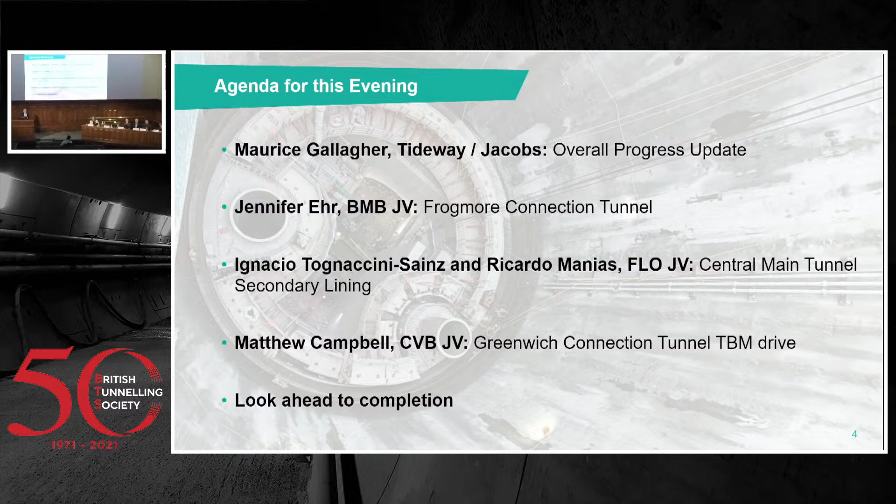Very quickly, and I won't spend much time because I think most people understand why we're doing Tideway. We've got combined sewer systems, so when it rains heavily, stormwater combines with foul water and we get discharges into the River Thames. It happens on average once a week, and annually about 70 million cubic metres of sewage flows into the Thames. That's the problem we're trying to rectify.

The solution is we're intercepting those flows. On this sketch, you can see our Victoria worksite. You can see the Bazalgette sewer just to the left of the tube tunnels, where we effectively break into the side of it and, via interception structures, transfer the flows when they get too high into the shaft, which is constructed down through, in this example, the foreshore of the River Thames, via a vortex down to effectively a stilling pond at the bottom of the shaft before entering the main tunnel, in this example, by a connection tunnel. We do have some shafts that are on line to the main tunnel, eliminating the need for a connection tunnel.

Overall, we've got 24 sites and 25 kilometres of tunnel that goes from Acton in the west out to Abbey Mills in the east, where we connect to the Lee Tunnel. The main drive sites are shown as the orange dotted numbers. Number 7 is the drive site for the Western contract at Carnwath Road. Number 11 in the centre is the Kirtling Street site at Battersea, from which the central contractor has driven both tunnels back to Carnwath Road and east to number 17, Chambers Wharf, which is the drive site ongoing at the moment for the Eastern Main Tunnel and will be the reception shaft for the Greenwich connection tunnel.

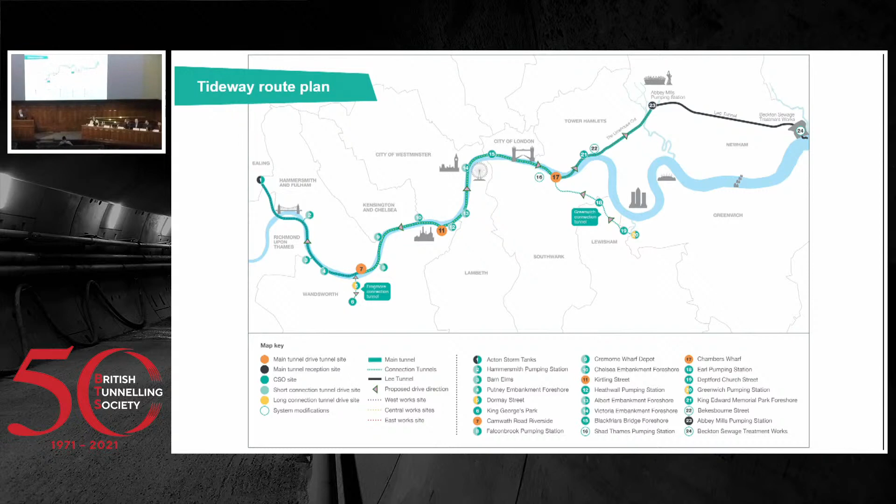I am going to just very quickly do a bit of a safety moment.

We deliver our tunnel segments to site by river. We're currently doing that at Chambers Wharf, and they come by barge to the site and are offloaded effectively by a grab. The grab is remotely operated, so no one needs to go near the segment stack as they're being lifted out of the barge, to eliminate that risk.

Recently, we had an issue with the grab. It got stuck on the segment stack and couldn't become dislodged. Tim, the barge operator, was asked to go in and push a button on the grab to release it. He did so. The load released, but it shifted and trapped Tim's arm. Tim's now off for at least a year, maybe life-altering injuries to his arm.

It just goes to show how easy these things can happen. Someone just trying to do the best they can to get on with the job, doing something that perhaps they're not fully aware of the risks involved with.

On Tideway, we have a process we try to roll out all the time. It's difficult because these sorts of issues happen all the time where people go a bit above and beyond to keep the job going. But on Tideway, we use a process called step back, where if we spot any change, if anything doesn't look right, we encourage everyone to stop, take a couple of minutes, think about the issues, think about whether someone else needs to be consulted, look at what the problem is, and decide if we have to put in a new safe system of work before proceeding.

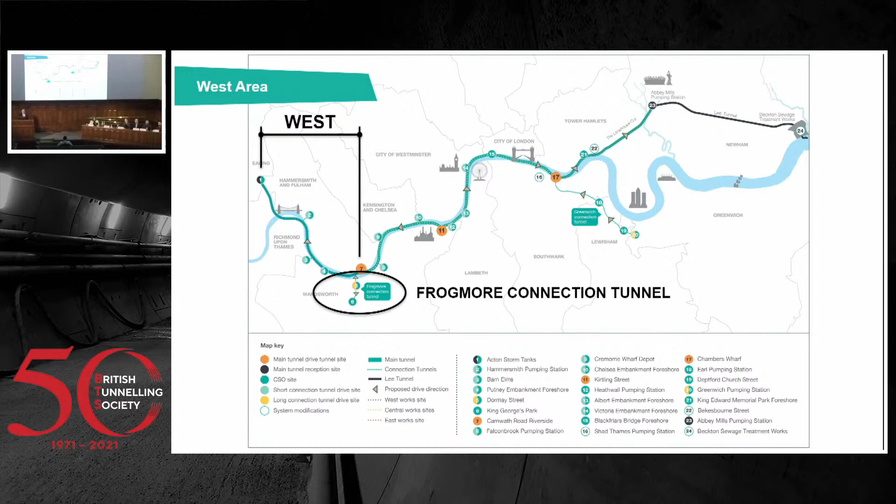You see the Frogmore connection tunnel there is circled. We're going to talk about that later, so I'm not going to deal with that now. But the west main tunnel, this time last year, the TBM had just finished really.

The TBMs were being dismantled. And since then, we've dismantled the TBMs, cleaned out the tunnel, installed secondary lining formwork, and in west now they've concreted over 1 kilometre of the secondary lining in that section of the tunnel.

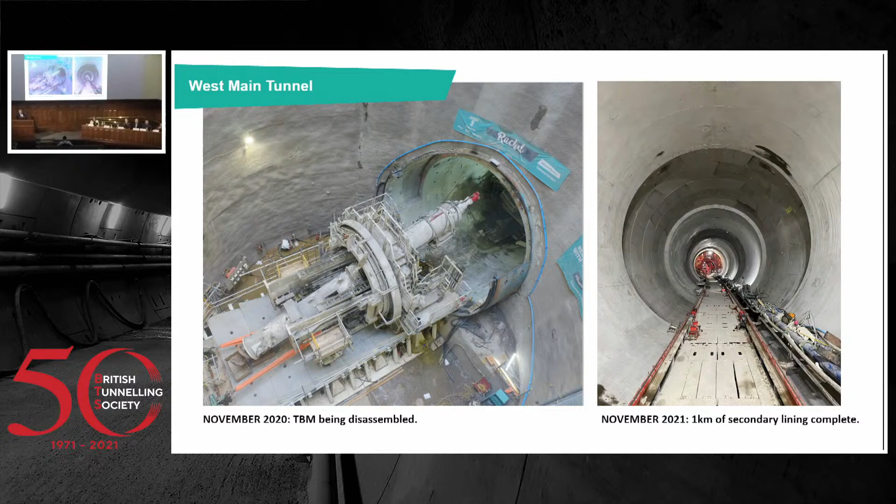Staying in west, there was also an SCL main tunnel element where they had to connect to the central main tunnel. That tunnelling was complete. It's only 140 metres long, but quite onerous works. The SCL works were completed, and now that section of tunnel is being lined, and it's about a quarter of the way through.

In central, 12 kilometres of tunnel, all done. The final tunnel connection happened November last year, with the TBM breakthrough into the CVB shaft at Chambers Wharf. And since that point, up to date, they have got 9 or maybe even 10 kilometres of secondary lining now complete.

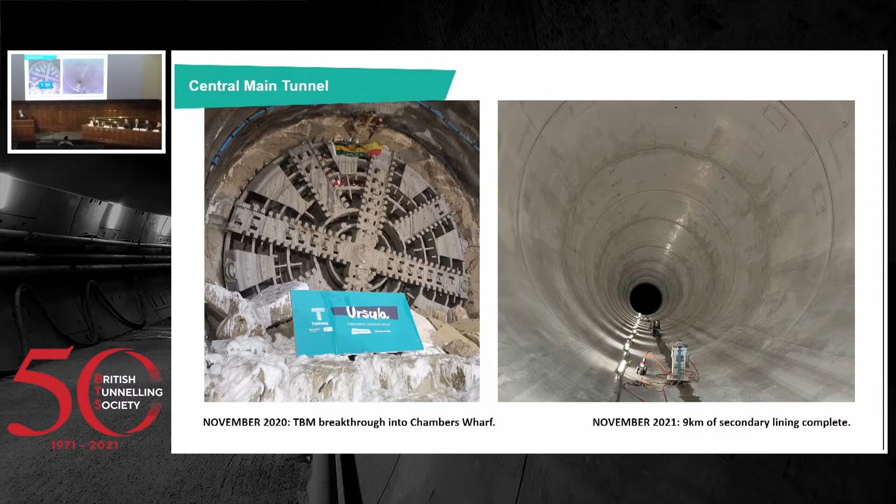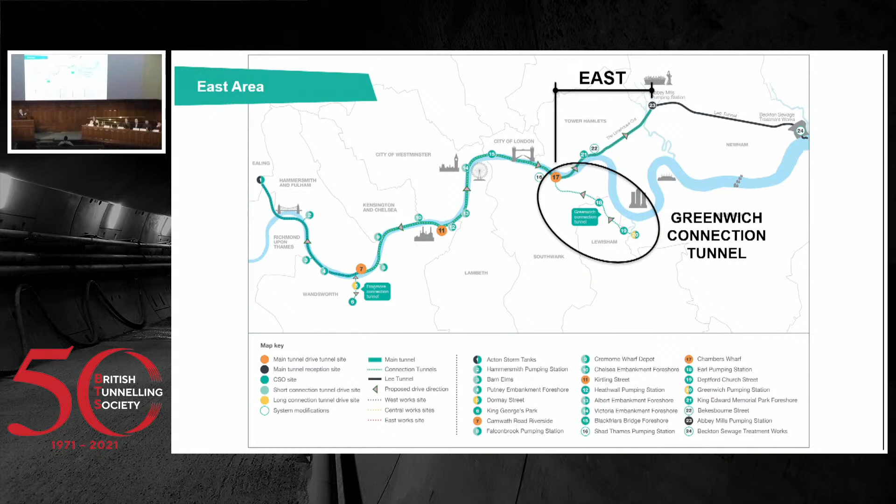And in the east, the only section on Tideway where we are still tunnelling. The Greenwich connection tunnel there circled - we're going to speak about that later, so I'm not going to talk about that now. But the main tunnel is 5.5 kilometres long.

Around this time last year, in November, the TBM was delivered. It came all the way from Herrenknecht's factory in one piece all the way to site. And during November, it was all being assembled in the shaft. This was happening at the same time as the central TBM was breaking into the base of that shaft as well, so there was a lot of works being undertaken through that period.

And to date, now in November '21, 2.8 kilometres of tunnel done. So just over half of that tunnel complete, and work's really progressing well in those tunnels.

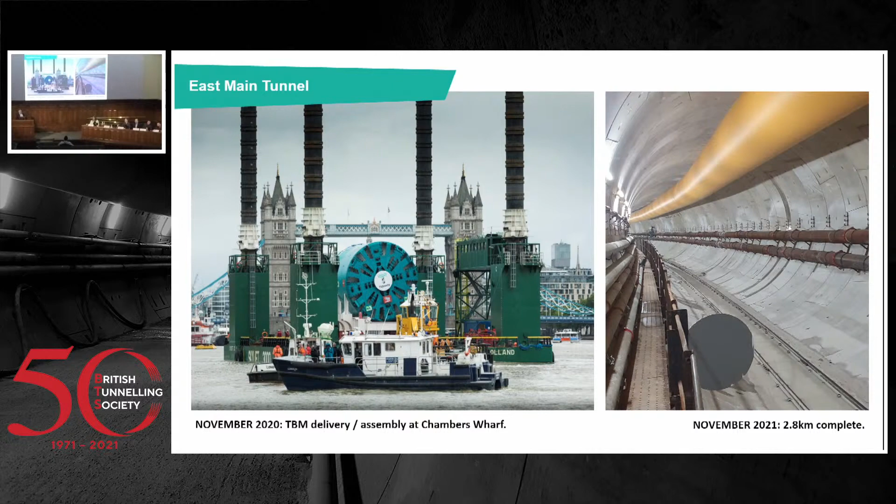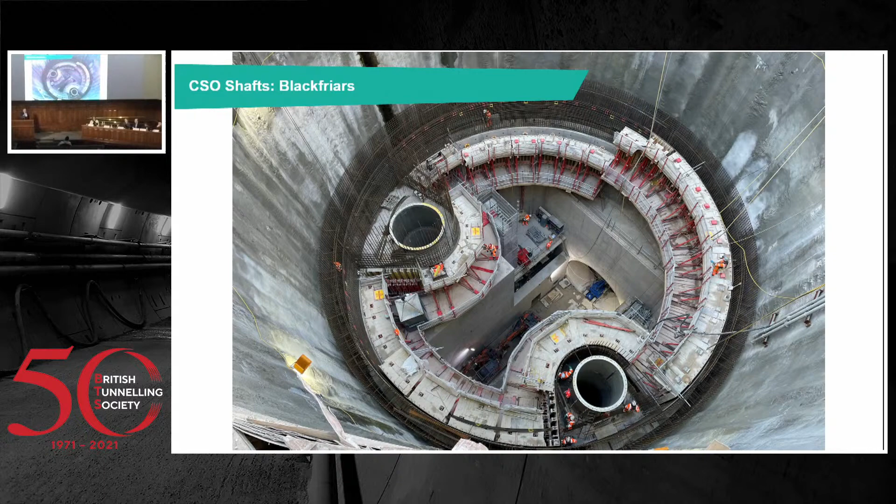Just another shot here - this is one of the smaller sites, at Blackfriars. But just to show the scale of some of the works that we're doing, off to the right of this photograph will be the sewer that we're intercepting, so the flows will be coming in.

Eventually, from left to right, the triangular steel section you can see being assembled is what we call a Vortex Accelerator. The flows will eventually come through from the sewer into that accelerator, which accelerates the flow into the vortex tube, which spins the sewage and takes it the 60 metres down to effectively a stilling pond at the base of the shaft. The scale of it is huge, and that's why I'm showing a few of these photos - it's quite big plumbing, really.

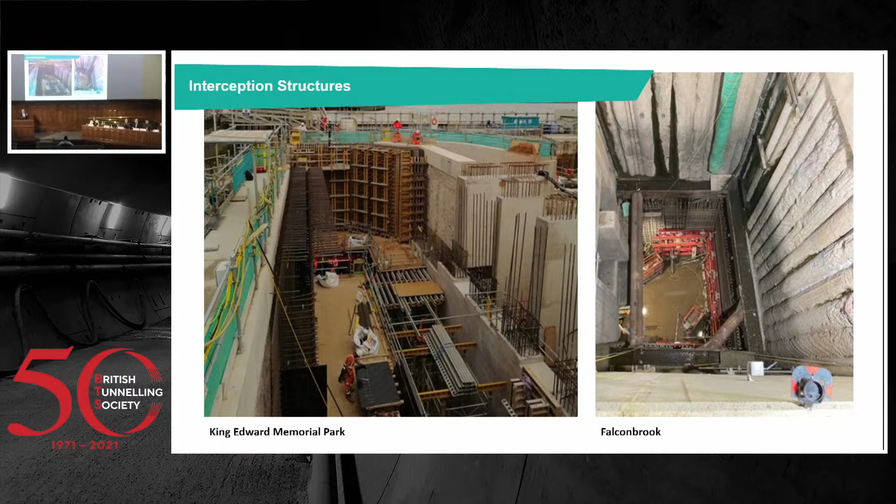I need to hand over for their detailed case studies now. So I'm going to hand it over to Jennifer to give us a talk on the Frogmore.

Good evening, as previously mentioned my name's Jennifer. I'm a site engineer at Dormay Street on the west section of the Tideway Tunnel. This evening I will give an overview of the shaft and preparation works, the primary lining and the secondary lining of the Frogmore connection tunnel.

The Frogmore tunnel was completed in two drives, one from the Dormay Street site to King George's Park and the other from Dormay Street to Carnwath Road. The total length of the tunnel was about 1.1 kilometres with a depth between 16 and 25 metres. Under the river, there was 13 metres of ground above the tunnel, and it was entirely in London clay.

Once commissioned, the Frogmore tunnel will annually divert approximately 18,000 metres cubed of sewage from Dormay Street - that's about 7 Olympic-sized swimming pools - and from King George's Park it'll intercept 86,000 metres cubed, which is about 34 Olympic-sized swimming pools.

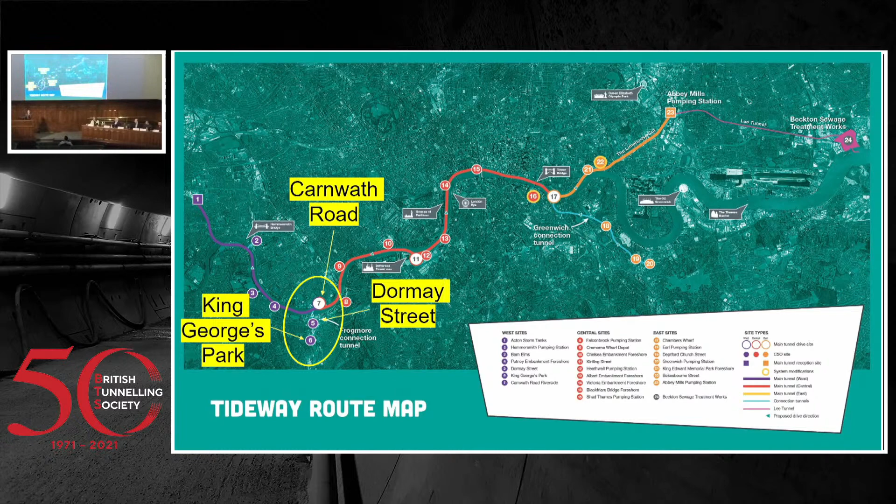One of the main site constraints at Dormay Street has been the strength of the river walls. The river walls 577 and 224 that you can see in the slide had an initial allowable surcharge of 14 and 0 kilopascals, and you can see they're in the zone of influence of the shaft, so construction couldn't begin on the shaft until we'd shored them up.

To do that, we installed 127 piles that would be able to support a slab that would support a 95-ton piling rig until it transported the loads beneath the toe of the river walls. After that, we installed contiguous piles for the river wall strengthening and also were able to install the secant piles to start the shaft excavation.

The river walls had to be able to withstand both loads from the construction of the shaft and also settlement from the shaft itself and the launch chambers that we constructed for the TBM.

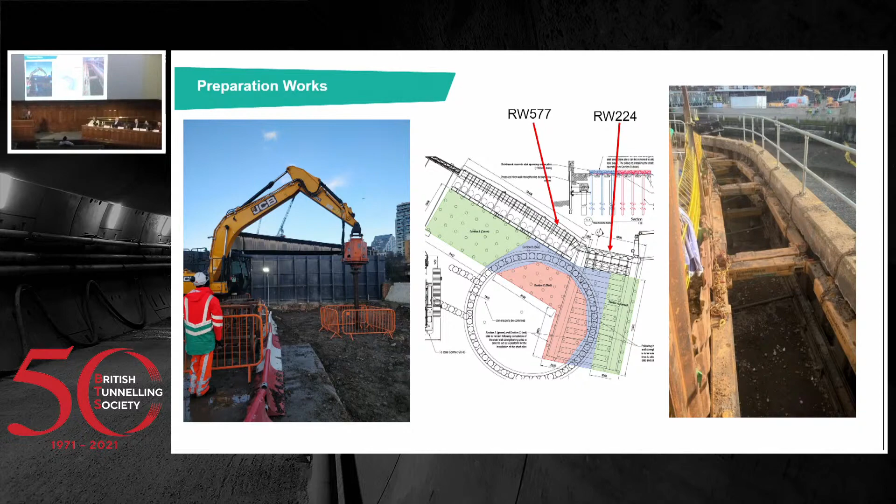The sprayed concrete lining was our primary lining for the shaft, and it was sprayed in 3 passes between a thickness of 375 and 700 mil. As you can see from the slide, we did that in 1.2 metre advances, staggering them with joints at 45 degrees. We made sure to prep them with jet washing and shovel to make sure it exposed fibres so we could get good construction joints.

We used a compound called Xypex in our mix, and that reacts with water to form non-soluble crystalline solutions in the pores and capillary tracts of the concrete. This eliminated our need for a separate waterproof membrane. We used accelerator between about 5.5% and 6.5%, and were fed by the 220-ton silos you can see in the slide.

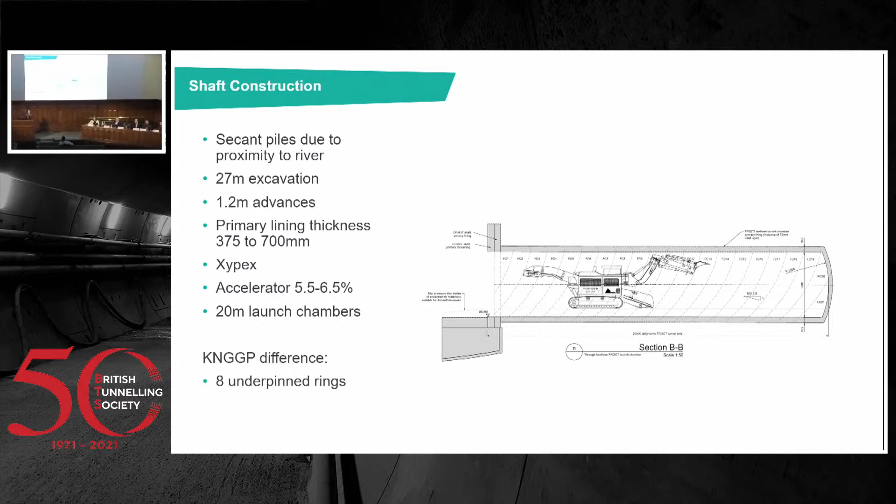Once we had excavated, we made 2 20-metre launch chambers for the TBM. These were of 4-metre diameter - they were actually 3 metres, had a vertical difference of 3 metres in height, the Carnwath drive being lower than the King George's Park.

The King George's Park shaft was done in a pretty similar manner, except there were 9 underpinned rings to start it off. Underpinning was chosen instead of caisson due to the proximity of the adjacent cofferdam.

We overall had about a 27 metre excavation at Dormay Street, and King George's Park, I think, was more like 22.

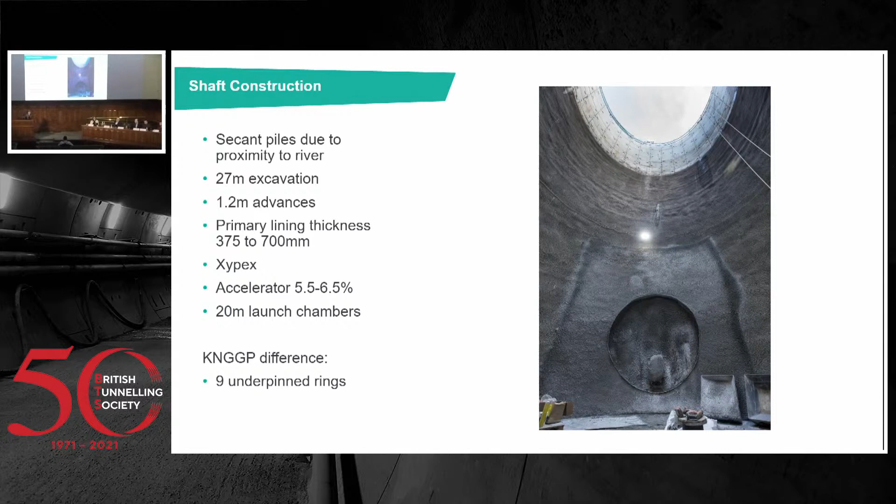Once the shaft had been completed and we'd done the launch chambers, it was time to move to tunnelling. Throughout the shaft, we were working days only on both sites until we went to the launch chambers, at which time we started employing a shift pattern of days and nights, 5 days and 4 nights. Our shifts were 11 hours long, with a break between 5 and 7:30 a.m. in the morning. That was at Dormay Street. King George's Park stayed days only throughout.

The primary lining was excavated, Frogmore was excavated using a Lovat earth pressure balance tunnel boring machine. This TBM was first built in 1994 for the 4.6 kilometre long Fylde Coastal Waters Improvement Scheme. Since then, the TBM had successfully completed 4 further projects, lastly the also 4.6 kilometre long London Water Ring Main Stoke Newington to New Riverhead in 2007, before starting work on Tideway.

However, before being used on the project, it was refurbished and upgraded by Magnor Plant to meet BS 6164 2001 and BS EN 16191 from 2014 as a minimum.

Modifications that had to be made included walkway alteration to enable minimum space requirements to be met. We reduced the manual handling requirements through the introduction of a lifting device to change the ventilation cassette and also drums for the cables. We had new rollers for a davit arm to lift tailskin and TBM grease cans. The PLC units were upgraded, and the screw was also modified with hydraulic rams to extract from the head. As you can see, the nominal cut diameter is about just over 3,300 mil.

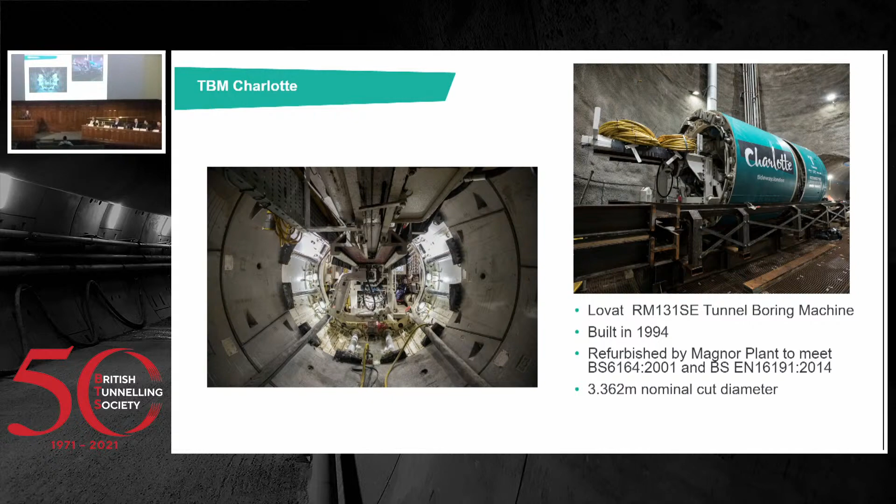For her journey under Wandsworth, the TBM was named Charlotte, after a local suffragist called Charlotte Despard. When fully assembled with 9 gantries, it's approximately 77 metres long.

Charlotte's first drive was from Dormay Street to King George's Park, a journey of approximately 500 metres. With her nominal cut diameter and the external diameter of the rings being about 3.21 metres, there was a 75 mil annulus that was filled with approximately 0.8 metres cubed of grout, each 1 metre advance. Throughout the excavation, the EPB target pressure was 1 bar to obtain a volume loss of less than 1%.

A particular challenge of this drive, as you can probably see from the drawing, was the alignment. This was chosen to avoid sensitive assets in the area and, as much as possible, to stay under the roads. You may have been wondering why I mentioned that the 2 drives are about 3 metres apart in depth, and that's because 3.2 metres below the King George's Park drive, we had a National Grid cable tunnel that we had to avoid. And then for the Carnwath drive, we needed to be far enough below the river bed.

The resulting tunnel contained 145 metre radius curves with approximately 15 rings of straight transition between each curve, and the TBM itself was launched immediately into such a curve. The rings were designed to have 12 different possible arrangements, and they are made of 6 trapezoidal segments. Each ring contained 3 different types of segments, and the maximum lead that could be achieved was just under 33 mil, and that was more than enough to ensure the 145 metre radius curves were possible. They required a 22.5 mil lead.

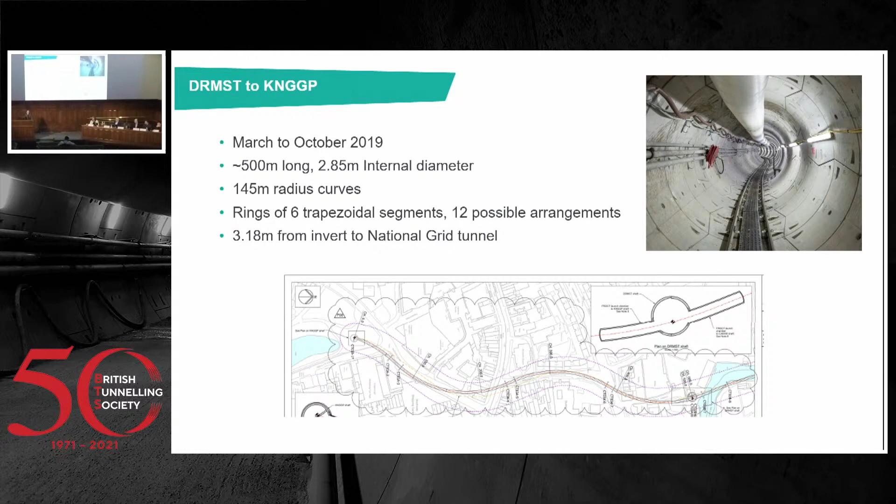The King George's Park drive was entirely through London Clay B formation, and apart from encountering some bands of claystones, the excavation was fairly straightforward. The ground conditions contained anti-clay polymers, and that helped the workability to allow for extraction through the screw.

After successfully completing her journey to King George's Park, TBM Charlotte was brought back to Dormay Street to begin her drive towards Carnwath Road. This tunnel was much straighter and mostly underwater.

However, as we had begun, COVID-19 hit and the country was plunged into lockdown right as we were under some very sensitive river walls. As Boris was announcing that we had to stay at home, we actually continued tunnelling for a week to do a safe stop for the TBM far enough away from the river walls. After that, we spent about 2.5 weeks at home reviewing our work practices and updating our risk assessments, before gaining approval from our client to come back to site.

However, when we did return, we stuck to days only and moderated the number of rings we did a day, conscious that the supply chain was quite affected by what was happening around the world.

Perhaps one of the more interesting parts of the drive was around ring 370, when we were transitioning to fully tunnelling in the A3II formation. We expected that, if anything, the pressure in the head would slightly increase, but we saw that the thrust was dropping a bit, and the driver commented that he'd noticed a change in the ground.

We had been warned of a potential pingo located approximately 50 metres south of the planned alignment at about ring 400, and so we suspect we may have caught the edge of such a drift-filled hollow.

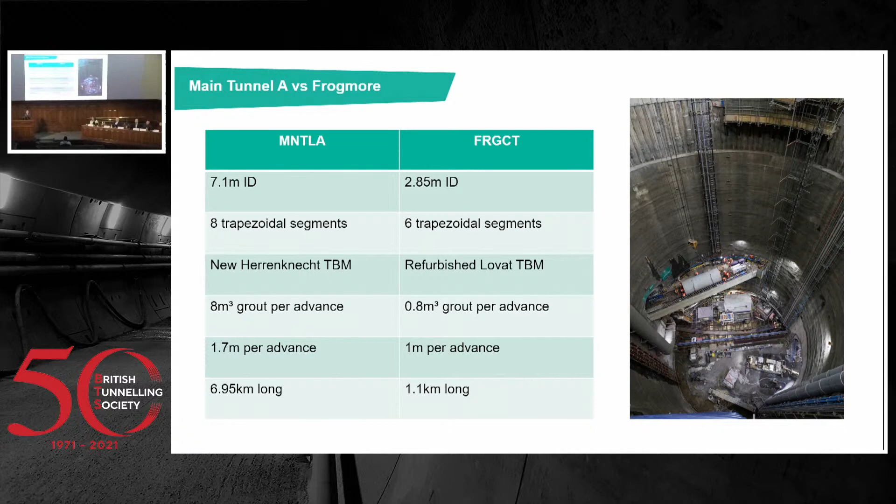The secondary lining of the tunnel was undertaken using shutters developed by specialist tunnel shutter supplier Kern Tunnel Technic. They developed 4 shutters that cast in a hit and miss sequence, allowing for faster production.

The required nominal thickness for our secondary lining was 150 mil to leave a final diameter of 2.55 metres, and the minimum allowable was 100 mil.

The 4 shutters varied in length, so for the King George's Park drive with the tighter curves, we had them be 4 metres long, and extended that to 6 metres for the Carnwath drive.

The King George's Park drive took a lot longer to complete than Carnwath because of COVID, and in total we had 1,420 metres cubed of concrete cast, which, as you'll hear in the next presentation on the main tunnel secondary lining, doesn't seem that much at all.

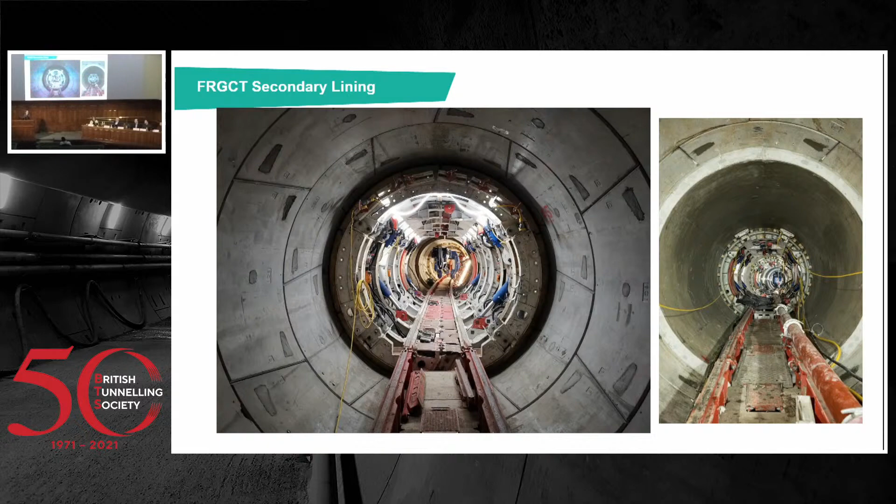The secondary lining of both the Dormay Street and King George's Park shafts was conducted using a slip form technique for the majority of the height, followed by several jump form advances. This was due to the changing geometry of the shaft lining around the Vortex drop tube and generator.

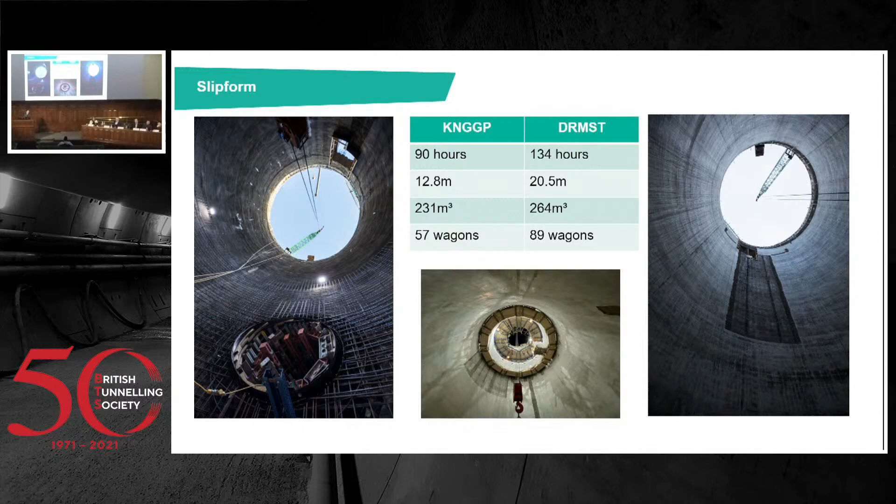The hydraulic structures in both shafts have since been completed. Both contain stainless steel vortex generators and drop tubes, designed to cause the sewage to helically flow down into the bottom of the shaft. There's hydraulic benching at pit bottom that guides the sewage through a weir wall and into the tunnels.

Across most Tideway sites, including King George's Park, both the vortex generator and drop tube are set in the middle of the shaft. However, you can see at Dormay Street that it sits to the side.

This is because the original proposed tunnel alignment had tighter curves, and so this was changed to a 145 metre radius, which meant that the tunnel had to be moved off centre of the shaft. The shaft itself couldn't be moved because of the tight constraints surrounding its location.

Fittingly, both Dormay Street and King George's Park finished pouring their cover slab upstands on the same day.

Working on the Frogmore connection tunnel has enabled me to learn about different tunnelling techniques and work with a range of people with vast tunnelling experience. I'm very grateful to all those who have taken the time to answer any questions I've had as a very green graduate. Thank you for listening.

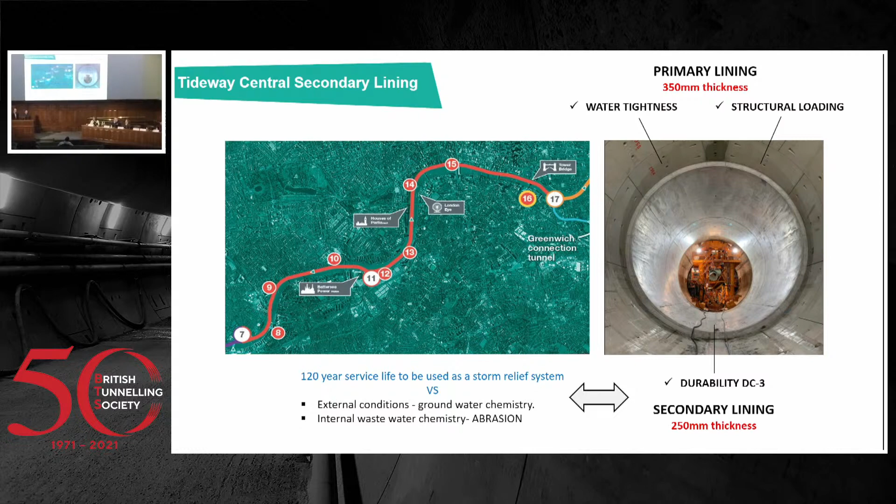Secondary lining has been pretty much an innovative operation for us. We had many lessons learned from past projects like the Lee Tunnel, so we decided as a team to think out of the box and come up with new ideas and solutions to overcome past difficulties. One key solution was the cast-in-situ option with the secondary lining shutters that you can see in the picture on screen.

These shutters were built by Tecosam, a Spanish manufacturer, and we had the opportunity to collaborate with them and co-design what you see here: a prototype that had never been tried in the industry, which has given us fantastic achievements in both production and quality throughout the operation at the tunnel.

The shutters are quite long, much longer than normal in the industry, almost 40 meters long, although the skin part, the gray part you can see in the picture, is only 12.6 meters, equivalent to 7 rings.

The shutters do 75 cubic meter pours, and we have 2 shutters, one on each tunnel, in full production, meaning 2 pours a day on each shutter and 4 pours a day in total.

These shutters are able to properly negotiate the curves of the tunnel, and a key feature is the bogies, the wheels you can see underneath the shutters. These bogies have given us a lot of flexibility when moving and setting out the shutters in the tunnel, which has been key to speeding up and achieving the production records we wanted.

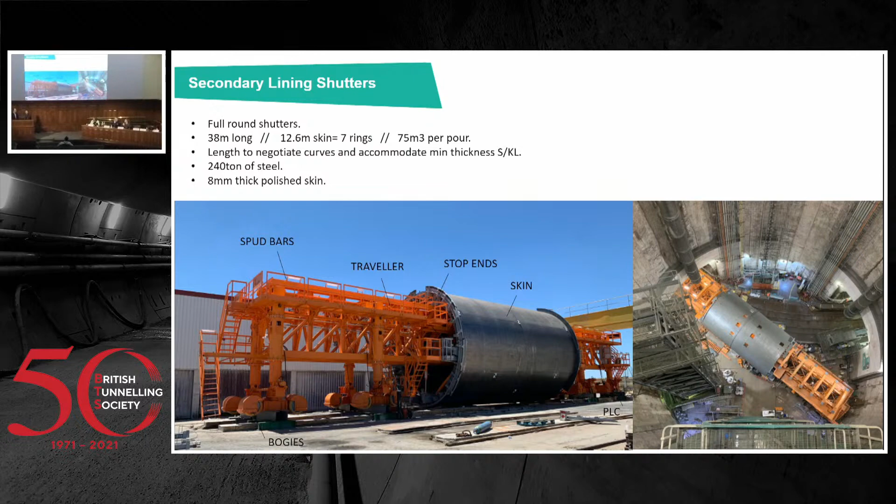We were not able to overload any single segment in the tunnel with more than 40 tons. This was prescribed by our engineer at AECOM, so we had to stick to this condition to make sure we wouldn't move any segments in the tunnel, which would cause leaks and repairs we'd need to sort out in the future.

Here you can see a few pictures of how we built the shutters. This happened during the worst time of COVID in 2020. Despite the difficulties, we brought them on site, built them as a team, put them on SPMTs, and finally put them underground, commissioned them, and at some point they were ready to work.

As I said, the main challenge with these shutters, also a main challenge in the Main Tunnel, was that overloading a segment could lead to a disaster. We reinforced against that by having a powerful PLC control system developed with TecoSam. With this PLC, we made sure the loads were always stable and spread across the primary lining, so we would not overload a single segment.

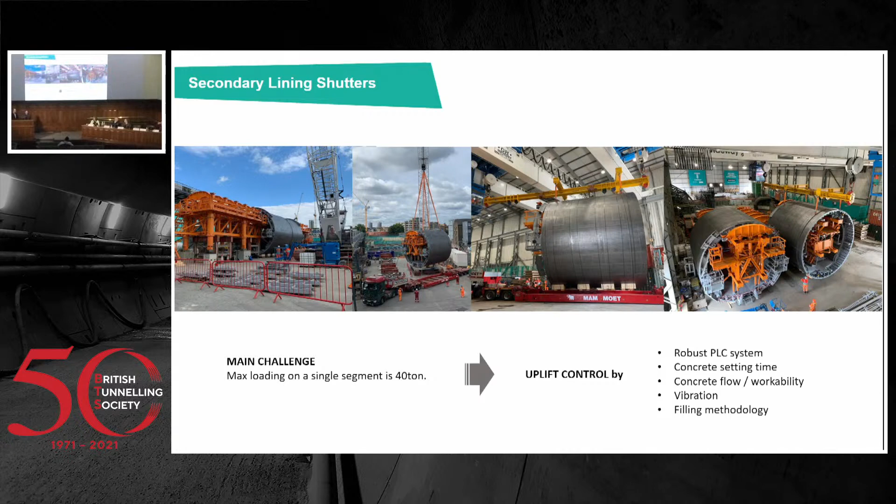Obviously, as well, the expertise of our team members by pouring the shutters in a certain way, vibrating, and many other things have made it possible not to create any mistakes. But the PLC was one of the main things that has made this prototype a great innovation.

On this slide, you can see how we normally pour the shutters and how the PLC interacts. Basically, the spud bars located next to the skin are the ones that actuate at the beginning, in conjunction with the bogies located on the sides. As you start filling, the shutter tries to float, so the load starts to become higher, and the deformation of the curve of the traveler starts to become more and more aggressive.

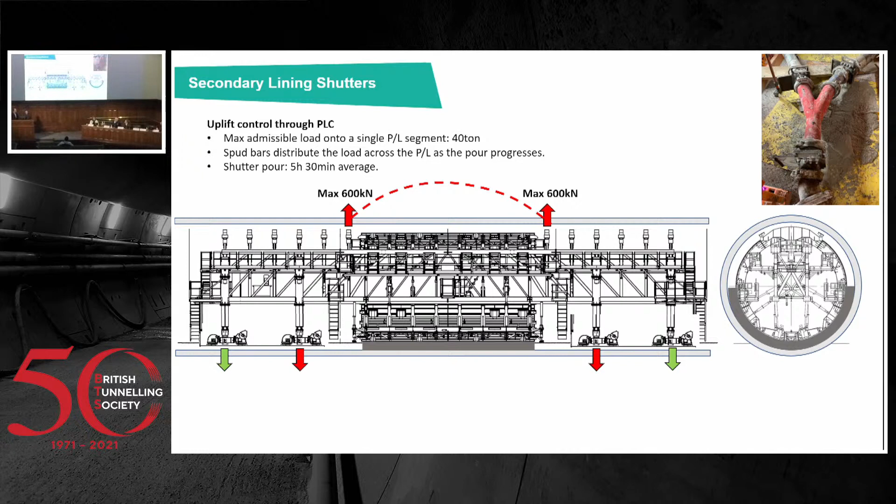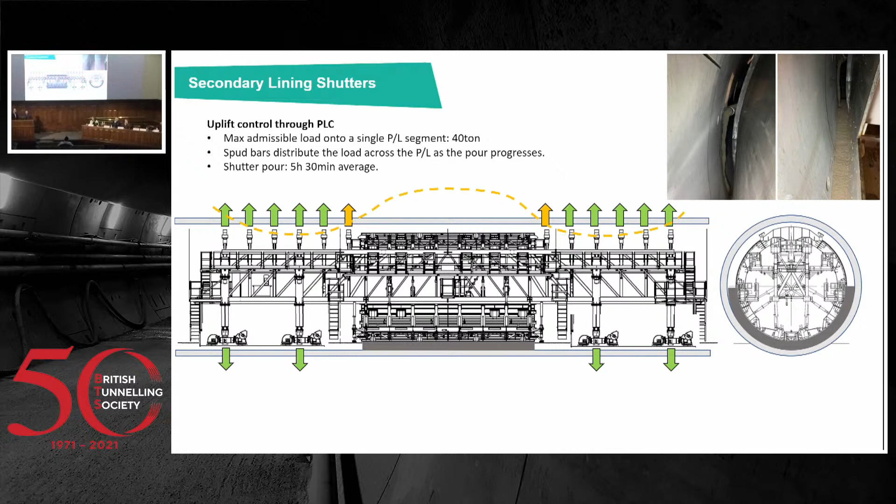In the worst scenario, we have a maximum of 600 kilonewtons that we can use on the spud bars, and this is the limit at which the shutter is trying to float, with risk of overloading the primary lining. In that situation, the PLC acts again and interacts with the spud bars on both sides, so all of them actuate and drop down the curve, as you can see.

Also, the weight of the concrete helps the shutter come down, so in the end the shutter is completely filled, and the last strokes of the pump are done through a port on the crown. With that, we make sure it's completely filled, but at the same time as stable as possible. Normally it takes us 5 hours and 30 minutes to pour.

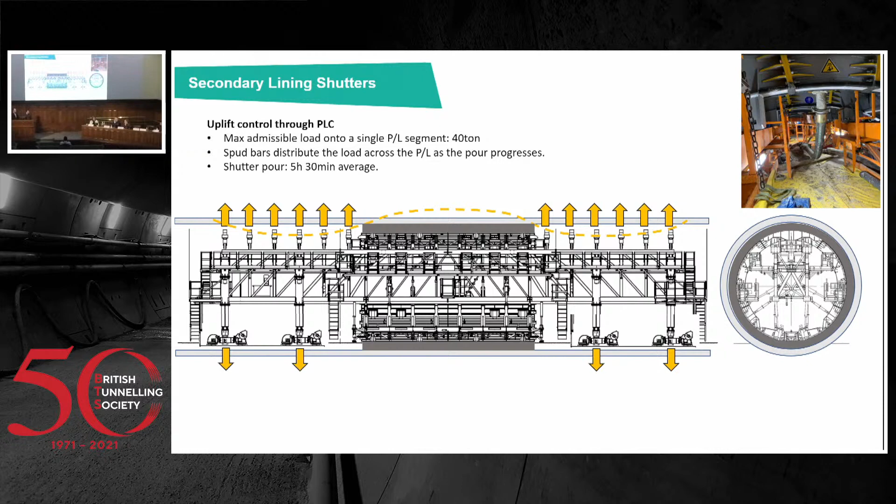Sometimes we've been able to pour in 5 hours, sometimes 6, and when both tunnels were running, the pouring time was penalized, but at the same time we were able to pour both tunnels concurrently, so it was a benefit in the end. As you can see, this is the result of it.

The result has given us very good quality. I dare say Tideway for now are quite happy with what they see. The expectations are so far fulfilled. We don't see many blowholes, we don't see many things to worry about so far. The quality is exceptional, I have to say, and the production has been very good as well.

But of course, while the shutters are important, the concrete is as well. Here Hanson played also an important role, and we worked with Hanson closely for many months with trials on site in order to make sure we would get the mix right.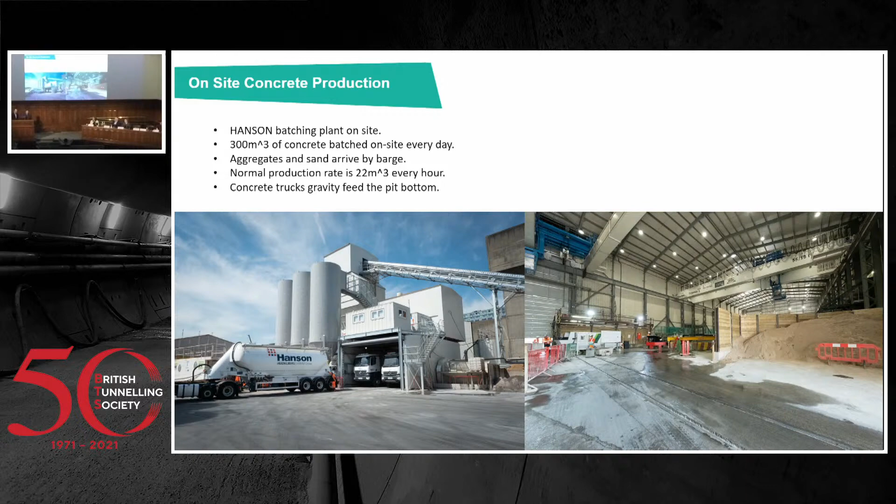The mix, as I say, was quite crucial. It's a steel fiber concrete, which makes it more difficult as well on the transport. And the key thing here was the sand.

We started with a marine dredge sand that turned out to be a bit dusty, and it would not suit our logistics. So we had to come back with Hanson and try to find another solution, and the solution was the Aabenraa sand, which is a land-based quarry sand.

With this sand, we were able to keep the consistency of the concrete that we wanted, so we would have slump flows of almost 700 on top.

And because of the logistics, in the longest distance of the tunnel of 5 kilometers, it would take us 2 hours and a half to take the concrete to the face. In the end, the consistency gets reduced, and at some point we were getting 600, but that's exactly what we were requiring. So in the end, the concrete mix was also an important key player to get this done properly.

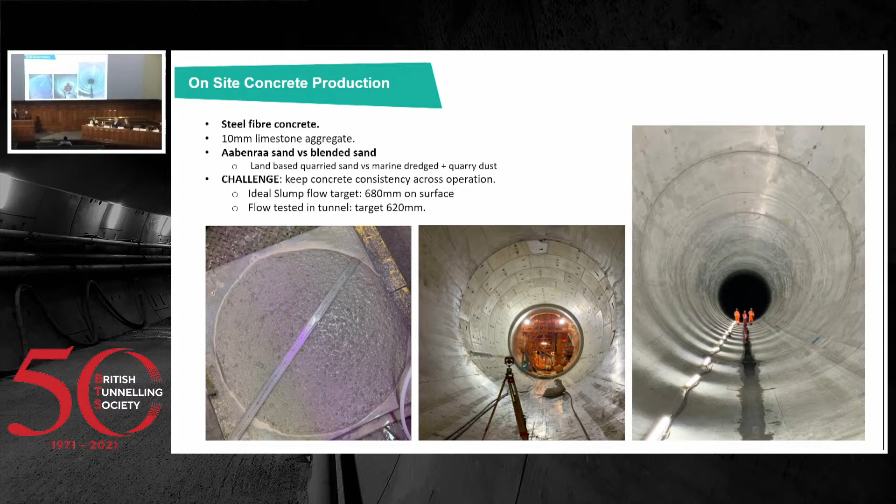I'm going to pass on to Ricardo.

Good evening, everybody. I'm going to talk a little about the rest of the plant and equipment we've been using within the tunnel in order to help deliver the concrete to the shutters.

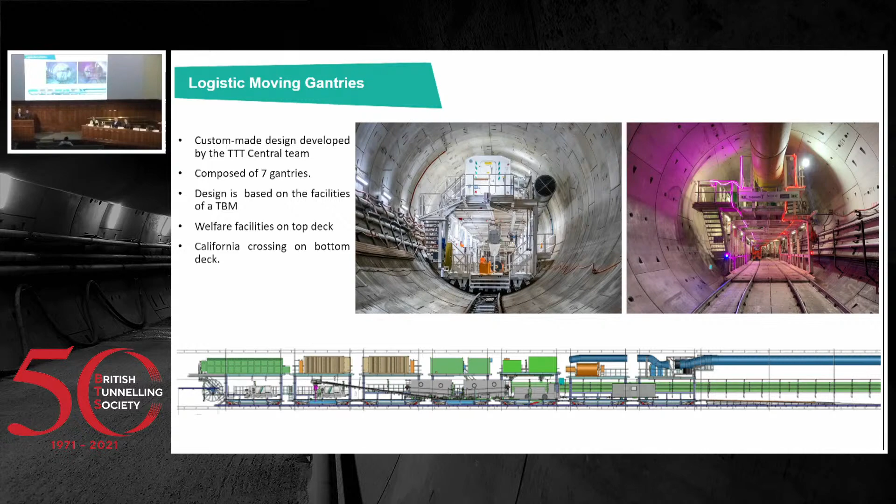As well, I'll talk about the special pours we managed to complete. This is the moving gantry, a machine based on the traditional TBM gantries, used as an auxiliary backup to support the shutters and the concrete operations. It is composed of 7 gantries and a switch at the back to allow the train to travel in and out. On the top level, you can find the auxiliary equipment necessary to comply with work within the tunnel, such as the rescue chamber, welfare facilities, the hydraulic power pack, and the HV rail that powers up the whole convoy.

One of the intentions of the moving gantry is the removal of the services and equipment installed within the tunnel as it comes backwards. This creates a clear section of tunnel between the front of the moving gantry and the shutters for them to be set up and ready for the following base pour.

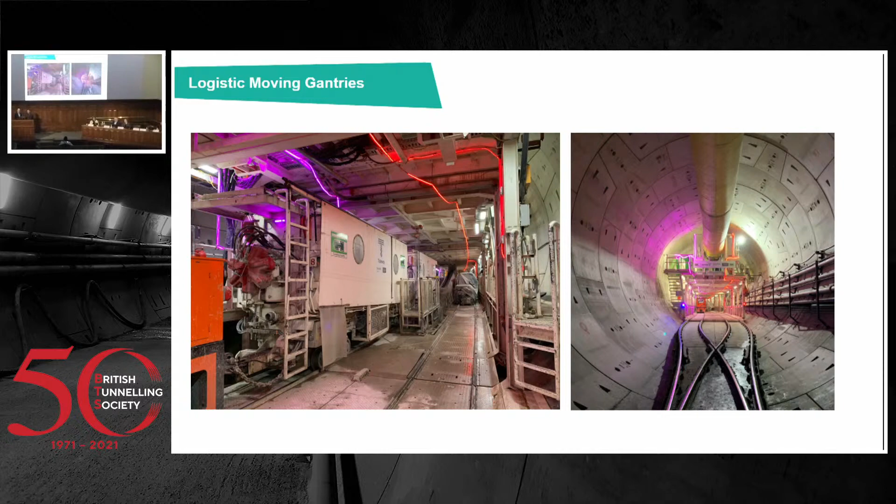The moving gantry has been an essential part of the supply and logistics for the production of the secondary lining. As the train comes in with the concrete wagons, those get parked at the discharge location, then plugged in not only for power reasons to keep the concrete moving inside the wagon, but to communicate with the rest of the elements such as the conveyor belt and the concrete pump. At this point, the final chain, the supply chain, is closed.

We've made a few more modifications to the convoy, like a traffic light system to manage the movement of the locomotives, and a clearer communication system for the operatives working in the shutters and the moving gantry. Also, all the information collected from the temperature and pressure sensors installed on the shutters was transferred to a PLC, to software designed by the PLC department, and displayed in graphs and curves for the engineers to better understand and monitor the process.

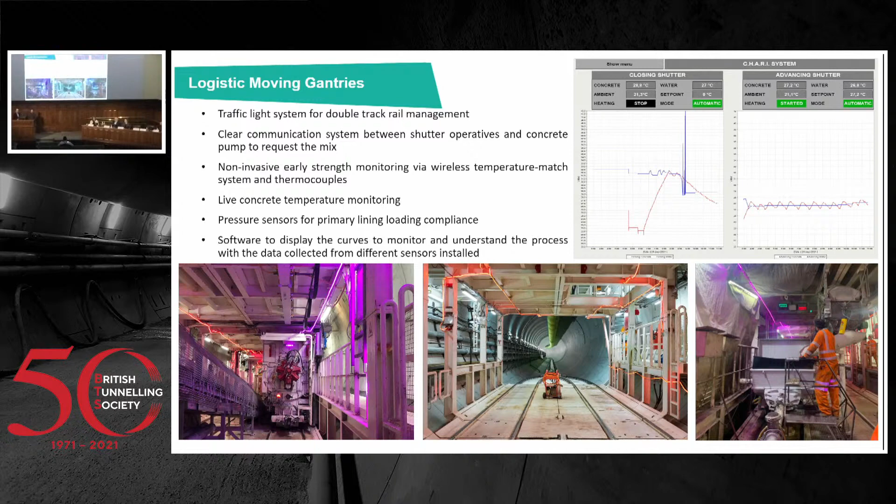Regarding the remixers, Tideway Central proposed a redesign based on the typical grout cars, with the aim of achieving better access for cleaning and maintenance purposes. This machine had to be more robust and powerful to move the concrete inside the wagon. At the bottom of the picture, you can see a typical section of the pit bottom of the shaft at Kirtling Street, when we were secondary lining both tunnels.

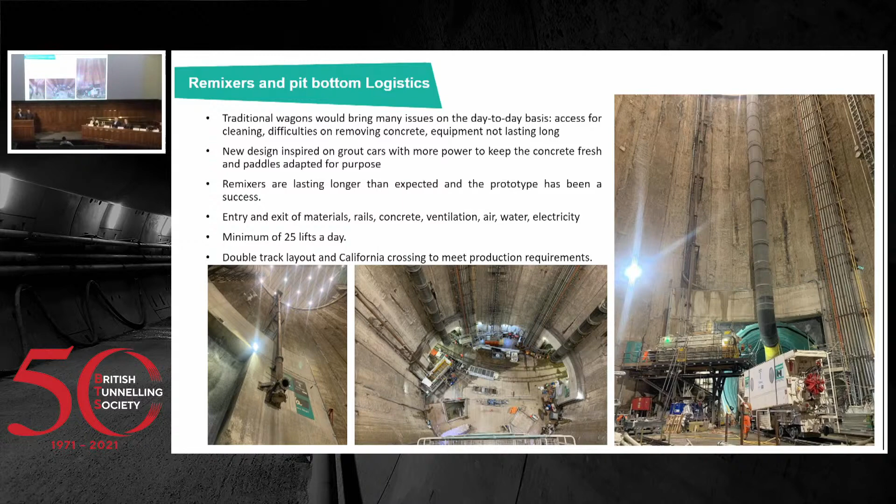As I mentioned at the beginning, we completed 6 particular pours where the connection tunnel meets the main one. In this part of the tunnel, the geometry had to change slightly to get a thicker section and allow the installation of reinforcement. To achieve this new shape, we had to swap and change some of the panels of the shutter skin. All this work happened and was planned to take place in situ next to where the pours were going to occur.

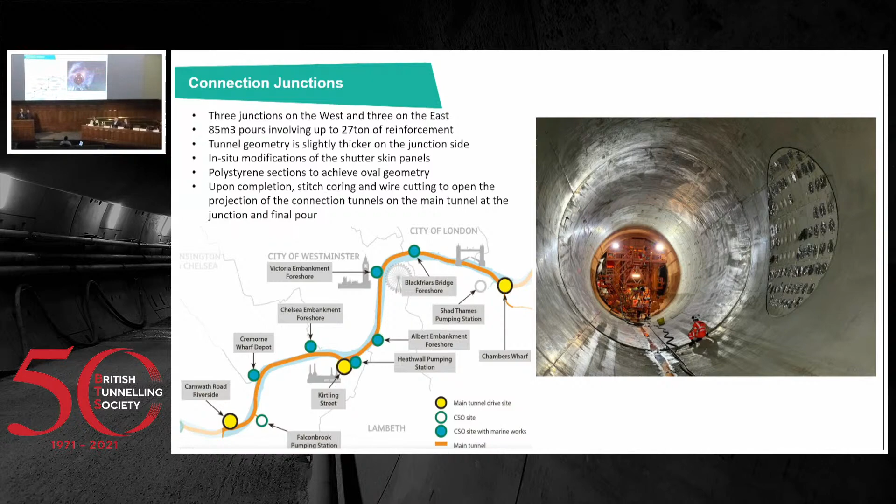You can see here how the works were happening when we were constructing those junction pours. The polystyrene piece shown in the figure was installed to achieve the oval section of the connection tunnel and leave the void for future works. To give you some numbers, this process involved around 85 cubic meters of concrete and up to 27 tons of reinforcement.

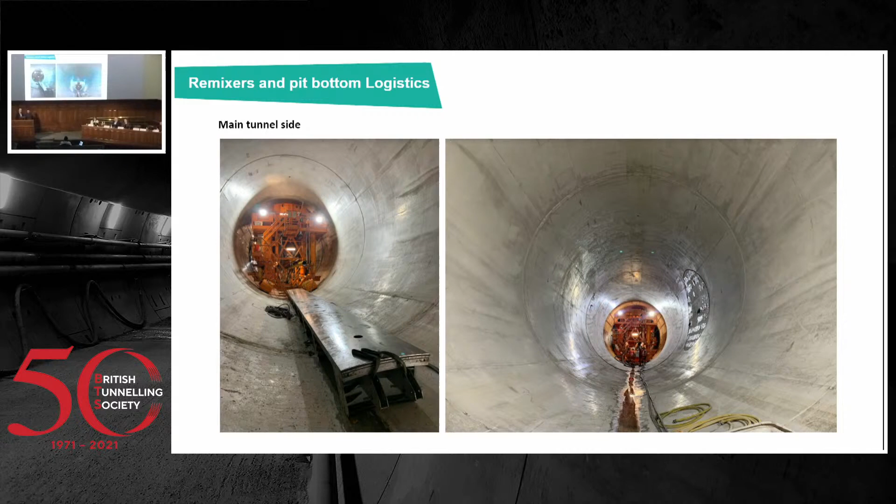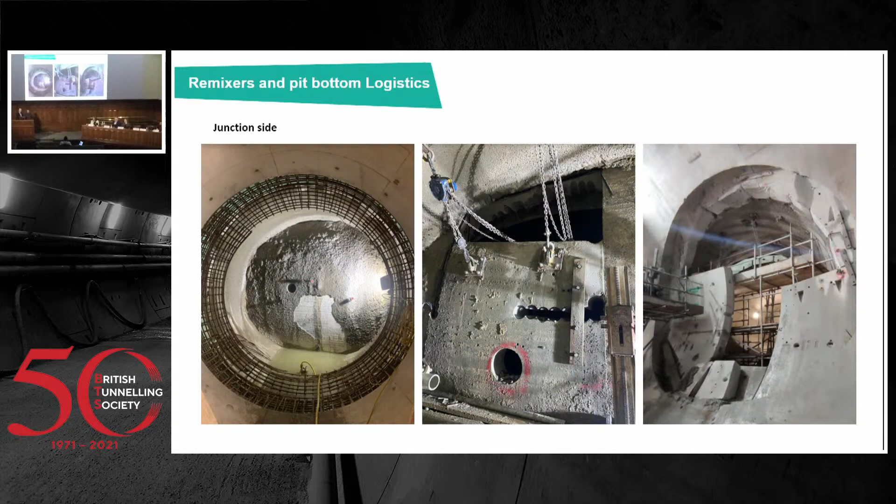Some more figures for the operation: upon completion of the junction pours, the projections of those connection tunnels onto the main one were opened by saw cutting and eventually some stitch drilling. Then waterproofing membrane and more reinforcement had to be installed, obviously, before the work happened, in order to tie back the connection tunnel to the main one. So far, 2 out of 6 connection tunnels have been accomplished by the Falconbrook and Cremorne remote site teams.

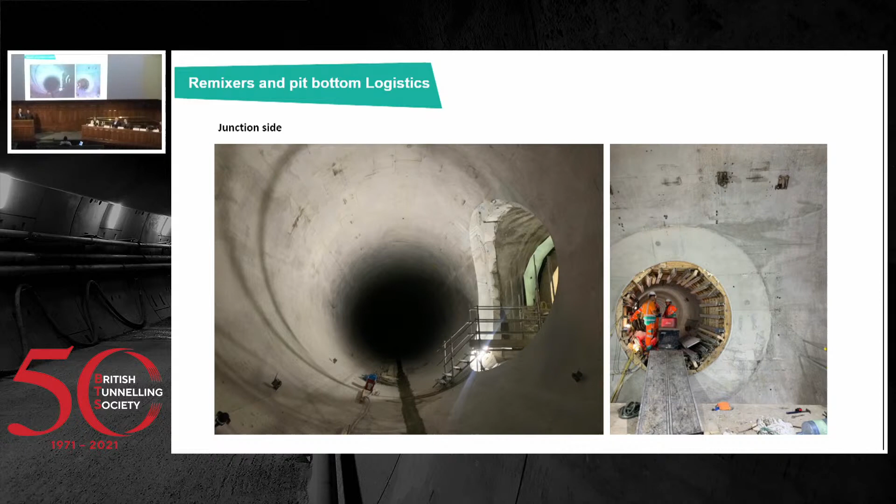So to finalize, Ignacio, we didn't want to miss the opportunity to talk about the program and the cost and all these important things, apart from the technical stuff.

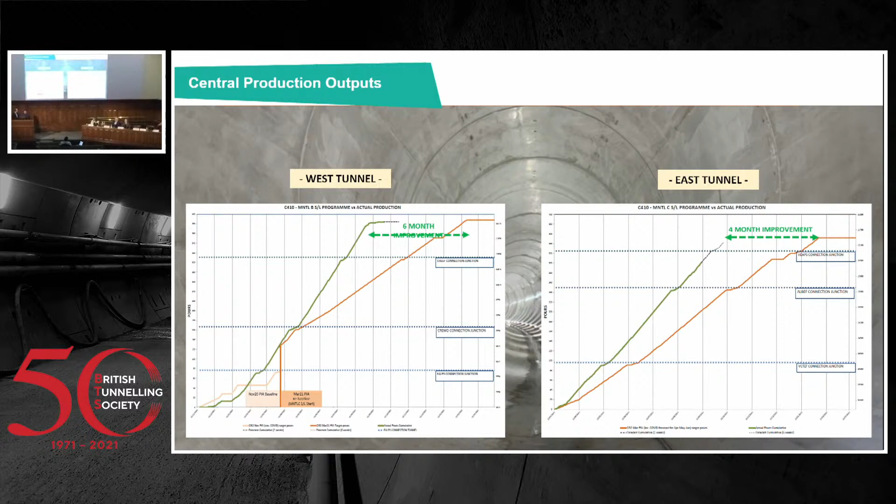So in Central, as you can see, these are the program curves we had planned. On the westbound, which was finished back in September, we managed a 6-month improvement on the general program after a very small learning curve of about 1 month. We started doing a couple of pours a day, and the team showed great skill in carrying out the pours properly. On the East Tunnel, we had an even better start, a 4-month improvement in the general program of Tideway. Turns out the East is also the critical path for Tideway Central.

This has resulted in savings not only in program but in cost for the whole project. Since June of this year, we started doing consistently 4 pours a day, and not only that, we got the cycle down to 24 hours and even 22 hours, which was quite impressive. We were pouring consistently 300 cubes of concrete a day, almost more than 2,000 cubes a week, a great quantity, and Hanson were still able to supply us with the concrete we needed.

So far we have done almost 10 kilometers of secondary lining, which has meant a huge saving in labor for the main tunnels. At the moment, the last pour we carried out was the adit in Kirtling Street on the east, back in November. Since then the convoy has been running from Kirtling Street 7.6 kilometers up to Chambers Wharf. I think we're going to get there tonight, if all goes well. We were planning to carry out a pour hopefully next week, otherwise sometime at the beginning of next year. We only have 3 kilometers left, which hopefully takes us to the middle of next year.

And with that, hopefully we manage to get the secondary lining done and make Tideway Central a good reference for the future. I hope you enjoyed the presentation. Thank you very much.

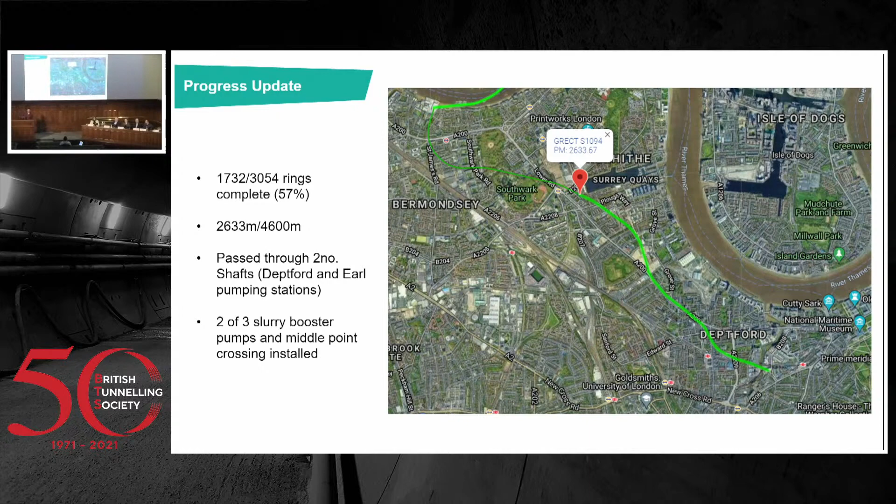Just a bit of an update on the progress so far. So Greenwich Connection Tunnel, we've completed around 1,732 rings out of 3,050, around 57% complete, 2.6 kilometres done out of 4.6 kilometres. We passed through 2 shafts, Deptford, about 500 metres into the drive, and then Earl Pumping Station, about halfway into the drive. They were backfilled and flooded for our arrival, we passed through them and out the other side. So all being well, sometime in the new year we'll be at Chambers Wharf and ready to break through and remove the machine.

So if anybody's not aware of the Greenwich Connection Tunnel site, it is quite a congested site, with a lot of different assets and stakeholders all around the site. As you can see there, the site just behind the blue shading, we've got the acoustic shed.

At one side of the National Rail and DLR lines, and then at the other side we've got the slurry treatment plant. To the bottom of the picture there, we've got Deptford Creek. To the top of the picture is Norman Road, and running through the centre you can see the National Rail and the DLR line. So Greenwich is sort of squeezed into an area between those four corners. And you've got Greenwich Station as well, just off the side of the site, which is handy for getting home, but it's quite close to the site.

Norman Road, which runs along the top of the picture, is now closed to public use and is used as our logistics holding area for all deliveries to site and muck away from site. That's used solely for the Greenwich connection tunnel works.

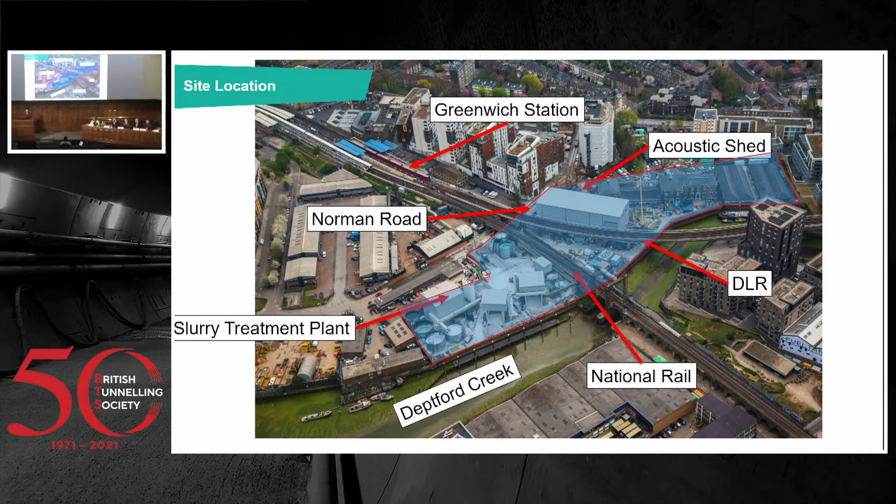Not ideal having a bridge run right through the middle of the site, but that's the way it is. The bridge passes just a few metres off the corner of the site, which caused a few issues during site setup for craneage and for what we can store under and around the bridges. We've got our workshops under there, and consent is required for what we store there, along with proper risk assessments regarding fire suppression and what exactly is contained. It takes up a lot of the site and is a bit of a hindrance.

But we've got around those problems, and on the plus side, it does provide excellent cover for the fitters whenever they're working on the workshops.

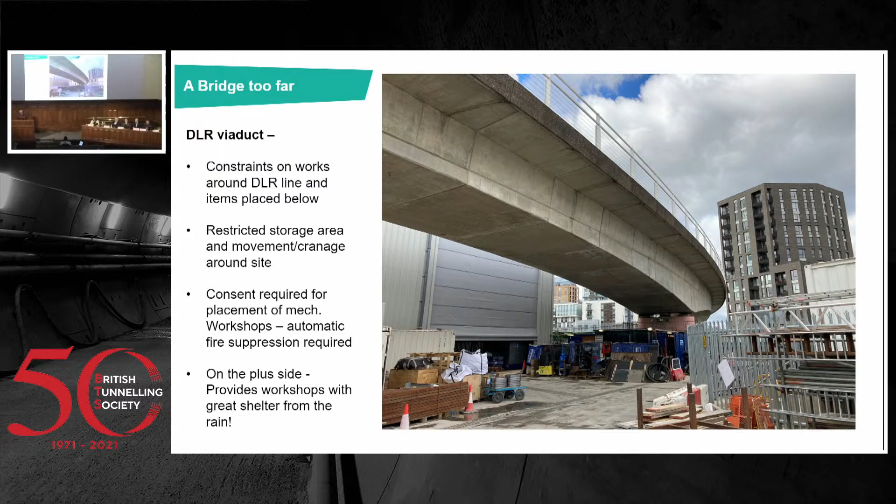The site is confined, with limited storage on site for all our consumables and tunnel rings. At Abbey Mills on the north side of the river, we've got our main logistics hub, which stores all our pipes, rails, grease and everything required to keep the TBM running. That's delivered directly from the supplier to Abbey Mills, and each tunnel site, main tunnel D and the Greenwich connection tunnel, have their own dedicated wagons which ferry equipment to and from site on a daily basis. That works well and is a necessity given the limited space we have on the sites.

Abbey Mills is north of the river, Greenwich and Chambers Wharf south of the river. So one main problem is the River Thames running through, between that and the Blackwall Tunnel. If anybody's driven in London, they know exactly what the Blackwall Tunnel is like and the problems it can cause. That's one risk regarding traffic and getting things to and from site, but as long as we've got an adequate stock at the start of the day, we can generally overcome a short delay due to traffic.

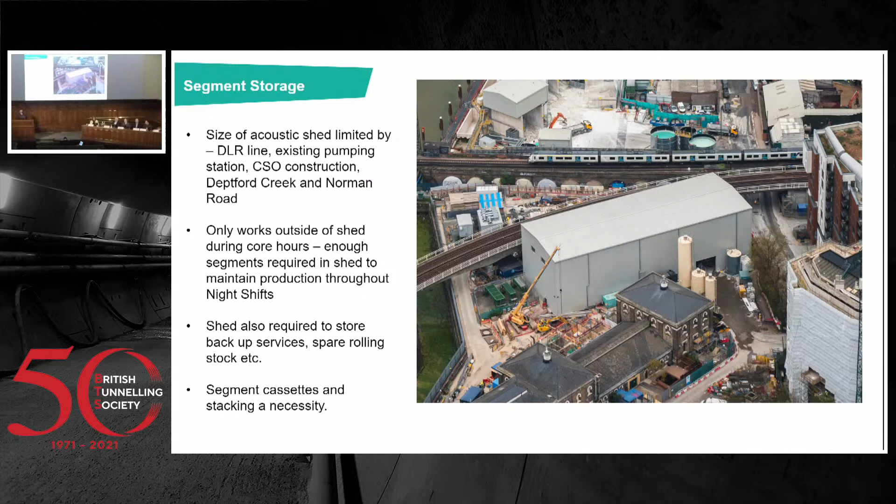Segment supply: our segments are delivered from Thamesport in Kent to site Monday to Friday, or Saturday if required. A good thing about this diameter of tunnel is we can get one ring on one wagon. Each ring weighs around 20,500 kilograms, so that can all fit on one wagon. The wagons do 2 to 3 trips a day back and forward to Thamesport, supplying all the tunnel rings.

Inside the shed, as you'll see in the next couple of slides, we can store about 26 rings comfortably, and we've got a bit of buffer storage for 6 or 9 rings at the other side of the shed if needed. That keeps us going through the night shift and part of the day shift if the deliveries encounter any traffic problems first thing in the morning, giving us enough of a buffer to keep going through part of the day shift.

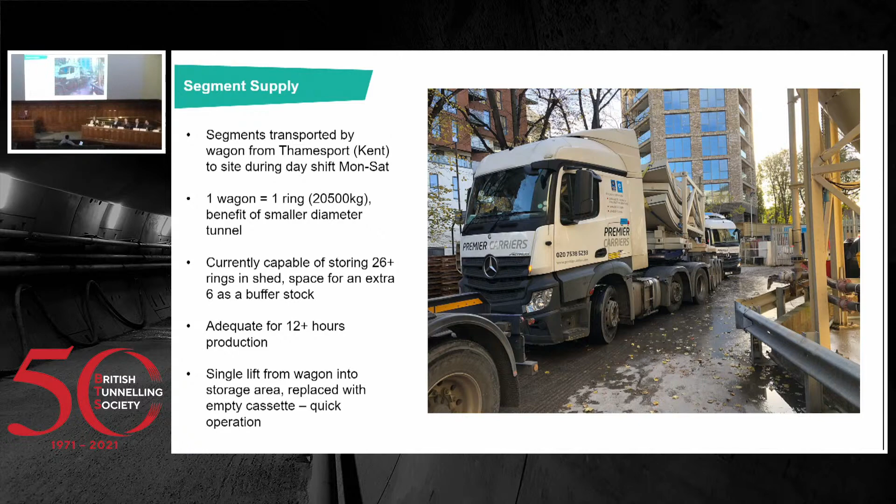As you can see, we utilised the segment cassettes. These segment cassettes are made up of 2 main parts: the cassette base and the stacking frame, and one cassette holds 1 ring. They were designed by CVB and supplied by Tunnel Engineering Services.

We purchased 60 cassettes, 40 stacking frames, and about 10 of the adapters, which go onto the normal container wagon and convert them for use with our segment cassettes. That 60 number of cassettes provides enough stock for the shed, stock for the storage segment site, and stock for the wagons running between the 2 sites, with a bit of spare capacity. So they seem to be working quite well.

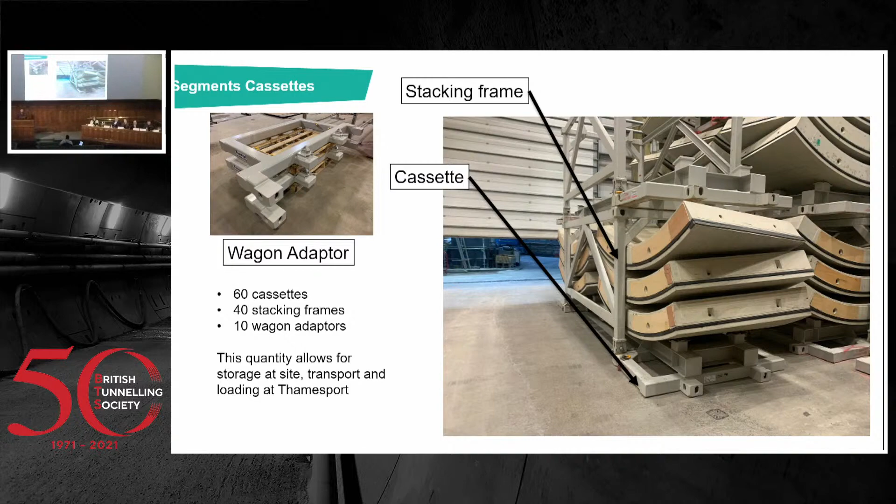Segment handling inside the shed uses a twist lock lifting attachment. As you can see, the lifting attachment in the top photograph is based on a container lifting device, similar to shipping containers, where it drops down. There are 4 twist locks at either corner that twist into position and enable lifting of the segment cassettes. There are locating guides on the lifting attachment itself and on the stacking frame, which allows us to drop them into position fairly easily without too much manipulation.

That removes the need for any personnel in close proximity to the lift. With a bit of tweaking with the tag line, we can get it lined up, drop it down and into position, which reduces the need for personnel in and around the lifting.

The gantry crane also utilises the cab at a high level, which gives a direct view of the load and of the lift in and out of the shaft and for the stacking—a clear view of the load from the gantry crane operating position.

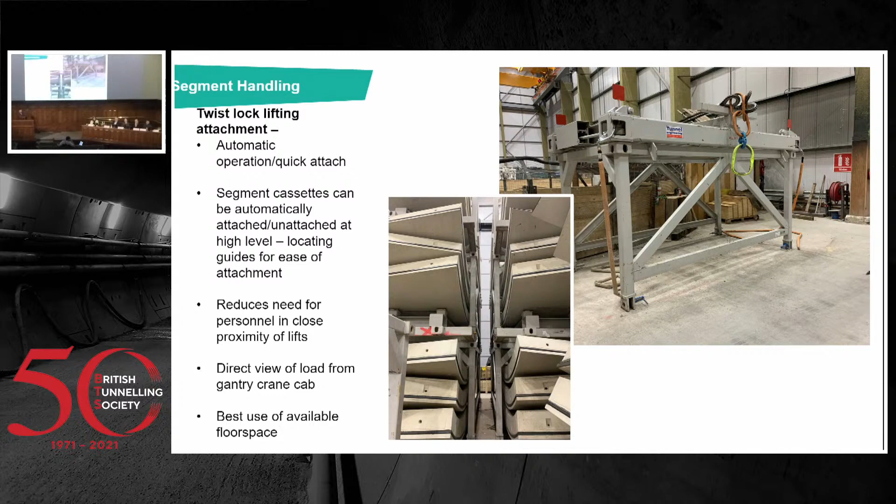As you can see there, the shed is full or near enough full of segments. We stack the segments three high, which is one of the main benefits of the segment cassettes—we can stack them three high and make the best use of the small footprint we have at one side of the shed.

Another positive point about the segment cassettes is the segments come to site contained inside the cassette, so there's no direct lifting of the segments, which minimises the risk of any damage. It also means we travel into the TBM with the cassettes without any risk of damaging them.

We've got 2 gantry cranes in the shed, one at the east side and one at the west side. One gantry crane is dedicated solely to the segments. During the day shift, it offloads the segments from the wagon, stacks them, and also supplies the tunnel with segments.

On a typical day, we offload around 28 deliveries during the 10 or so hours of the day shift, and also supply the tunnel with 18 rings. As you can imagine, that gantry crane is quite busy all through the day shift, supplying the tunnel, stacking, and removing segments from wagons.

Tunnel transport is quite conventional, as with most TBMs. We lift the cassette from the top, lower it down to pit bottom, and lower it onto the flatbed. The flatbed has a twist lock attachment as well, which locks the cassette into position. The top blue frame you can see there is then disconnected—the 4 pins in the corner disconnect it—and then it's taken to the top.

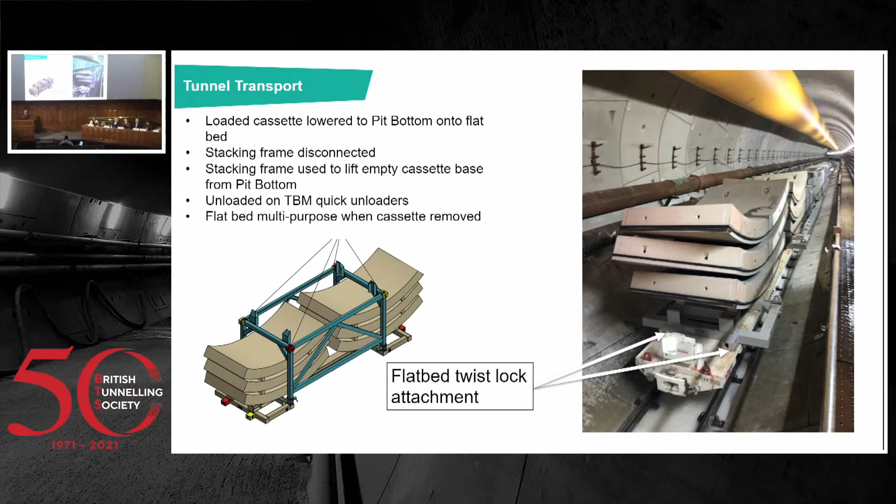The flatbeds are also multi-purpose, so once the cassettes are removed, it just acts as a normal flatbed. As you can see, after a very productive night shift, you've got a shed full of empty cassettes—that's a bit of an exaggeration. We generally don't have many rings left, but we've got none at that moment.

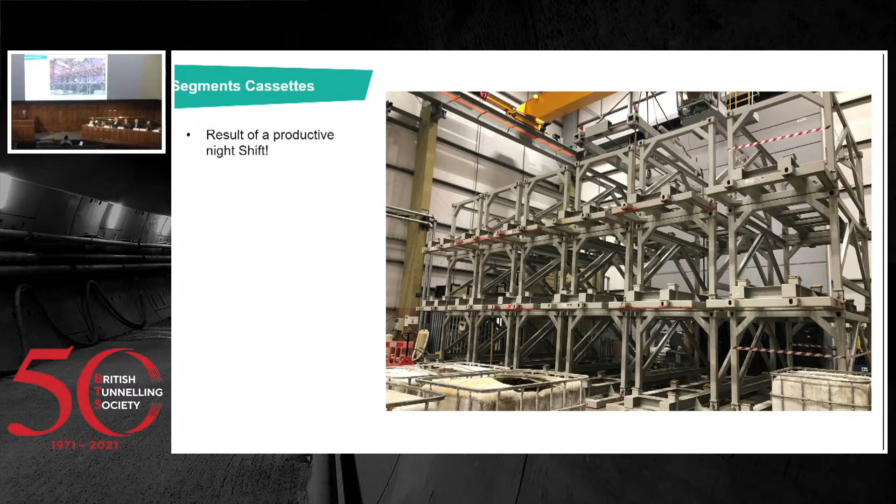But it just shows you the best use of that space in the shed for the cassettes and the stacking system and the neat rows. It's a good system which works well.

Just quickly going to mention again the segments and consumables, pipes, etc. Now the slurry - as I mentioned at the start, our site is split into two distinct parts, the slurry treatment plant and the drive site and shaft site on the right hand side, with the national rail line through the middle. One of the downsides is the transport of the slurry from the shaft to the slurry treatment plant.

What we've done is got a culvert across the site below the pedestrian footpath, below the arches of the national rail line, and then across the slurry treatment plant site to the desanding and desilting building at the far side of the site. That's the way it had to be done, just with the confines of the site, and it works well.

Pedestrians, I'm not sure if they realise that while they're walking along there's 1,000 odd cube an hour running below their feet, but anyway.

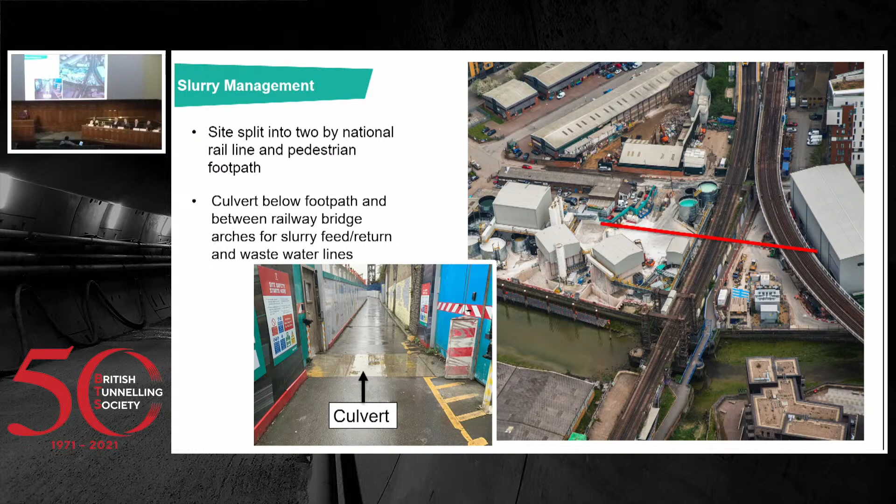And then muck away itself. From a TBM, on a good day, we process and produce about 3,000 tonnes of muck, of chalk, per 24 hours. We muck away by road and by river, just with the constraints of the Deptford Creek we can't get all muck away by river, so we've got a bank of the trucks as well, of the wagons, which can come onto site. But we do make best use of the river when we can.

So far, we've removed around 75,000 tonnes by river. That equates to about 45% of the total muck generated by the project so far, and the rest has gone off site by wagon. Tideway's target at the start was 30% for muck away by river, and we're now at 45%, so well exceeding that, and that's going to continue towards the end of the project. That equates to around 4,500 wagons taken off the road so far - a great achievement there to make the best use of the river.

The site at the slurry treatment plant is not as restricted as our drive site. We've got a reasonable amount of room there to bring our wagons on site, load them and get them turned and off site again. So it works well there as well.

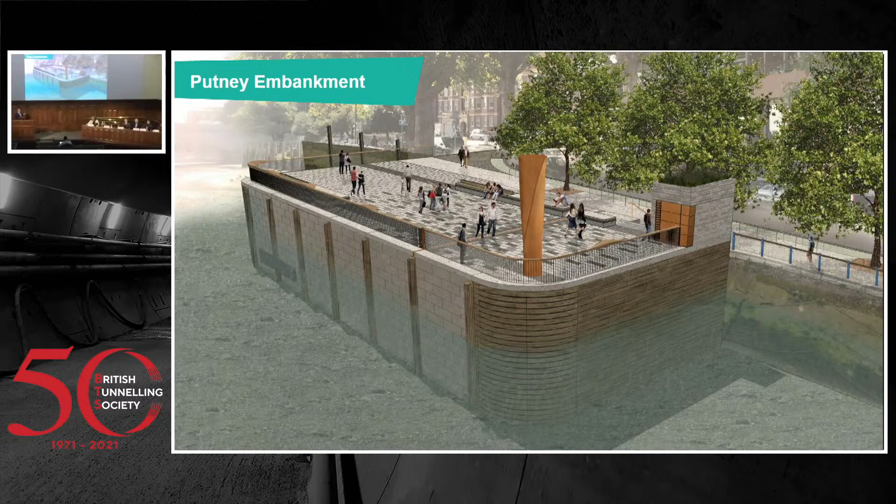So again, right briefly, this is an image created probably at the DCO times, 2015, of what Putney would look like, as part of the planning application with the river walls and the fendering, etc.

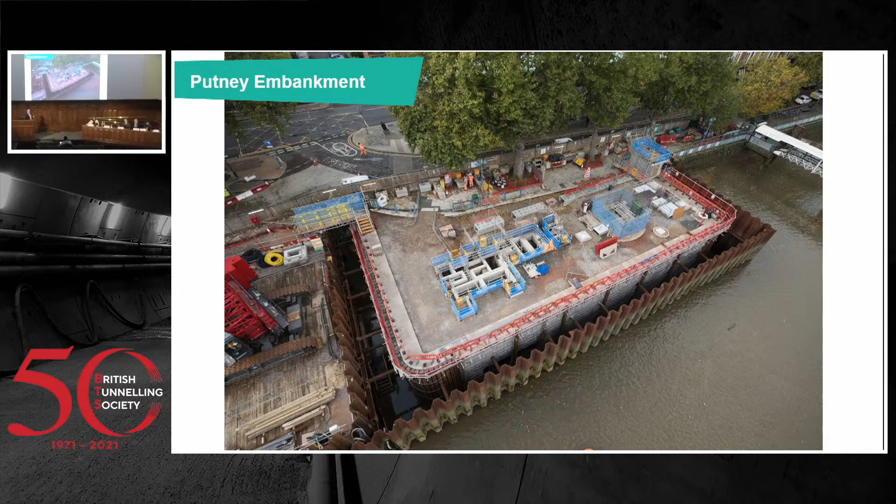And currently, you can see where we are at Putney, and across a number of our sites. It's nice to see the shapes appearing now, the new realigned Thames, what we're going to end up with - that legacy. You can see the fendering going in and the river walls being clad.

The secret here now is to ensure we get the permanent flood defences in place, get all the finishes complete, so we can remove the cofferdams. A lot of work - we spent a lot of time getting into the river, and now we've got to start coming back out of the river so that we can do the final outfalls and any scour protection measures required around some of our structures.

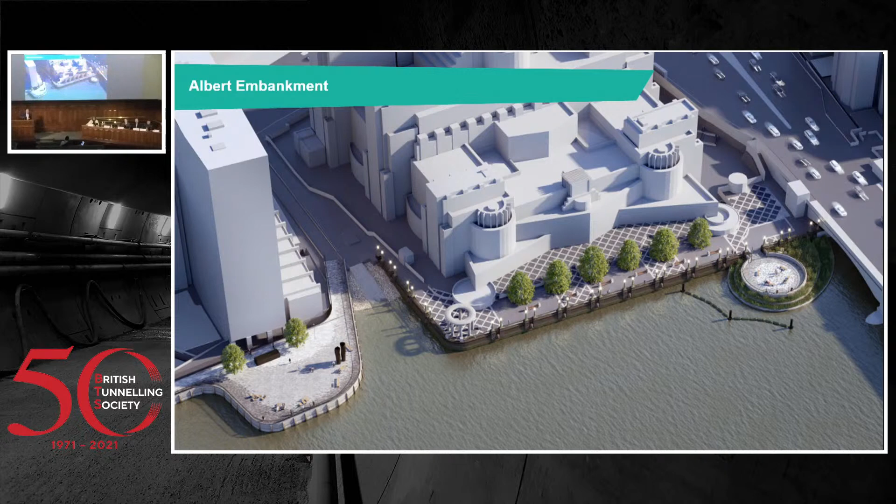Just another one, this is at Albert - the big building in the middle is MI6. You can see there's a shaft-like structure there beside the bridge. It's actually a rectangular structure under that circle - that's just an architectural finish.

But then the other promontory into the river at the bottom left of the slide shows where the main shaft is on this side, and you can see there the two ventilation columns. Again on that side, and this has been replicated across most of the sites on Tideway, the river walls are being created and the finishes are going on.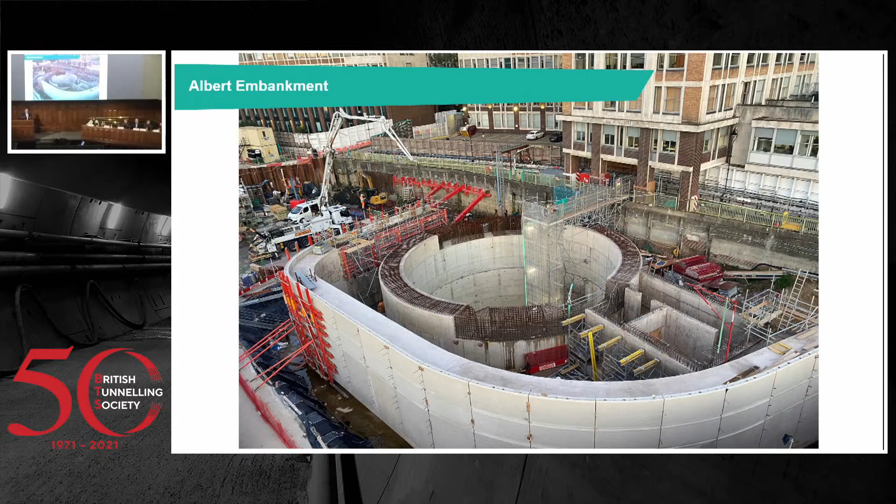We're up to cover slab levels now. So the secret is now to finish off those finishes, get cover slabs on, and a real secret for us is to get everything below ground done, sealed, out of tunnels and shafts to now enable the subsequent progress.

And then programme, you can see the line where we are today. Key things that we've got to complete: the CVB team have got to complete the tunnels in East. Both tunnels in East are over halfway through. They should complete April, May next year. Following that, they need to do the secondary lining.

In West and Central, secondary linings in the tunnels are ongoing. Those need to complete, and then we'll see a real scale up of all the MEICA works, etc. The key date for us is trying to drive forward to the start of commissioning. Once we start commissioning, that means we're out of tunnels and shafts and we can accept flows into the system. That's a key date for us, and we need to get out of the tunnels and shafts.

You'll see some of the construction activities go on beyond that, and that is due to start commissioning, we just need the system in place. We don't need all the architecture and landscaping done, and we don't need to be out of the river on all sites. So some of those works will carry on while we're doing the commissioning of the system.

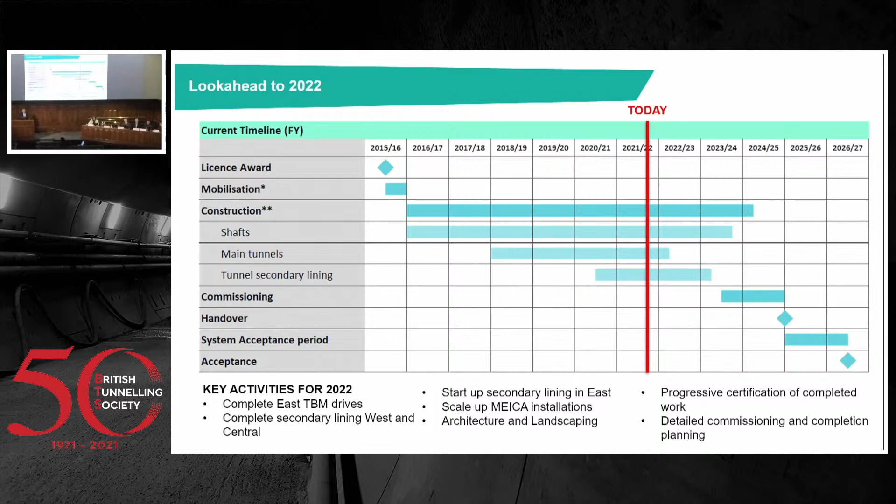So I think that ends it, a few thank yous to all of those on the screen now for delivering Tideway currently, for the team over here that have delivered some fantastic presentations, and to all of you for listening. Thank you.

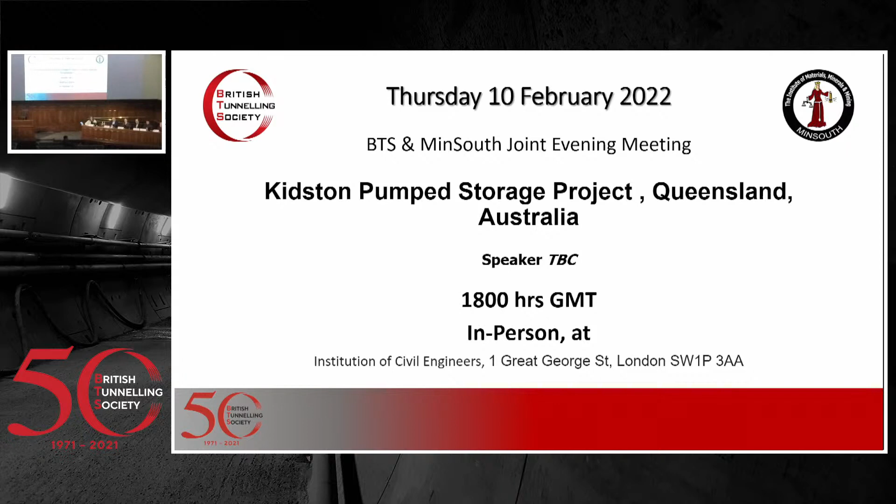Just as a reminder, we are always welcoming any papers or lecture topics that you have. Even if it's not for yourself to give it, you might be able to link us up with someone that wants to come and tell us about something interesting. So please get in touch, in particular either through the BTS email address or by contacting Sarah Langley. Papers on any subject relating to tunnelling, and please put your submissions in by the 11th of February. It's open to any individual aged 33 or under.

We also have the call for the Doug Allenby Memorial Medal. This is a new award, and it will be awarded at the BTS YM Conference 2022. The call for applications is by the 6th of February 2022.

So the next one then, it's a bit of an update from Tunnel Skills. They are really looking for your feedback on the virtual reality training that they've put together. If you haven't checked out the immersive learning that they've got so far on their website, please do. They'll be more than willing to come and tell you more about it as well - a fantastic tool that they've created there.

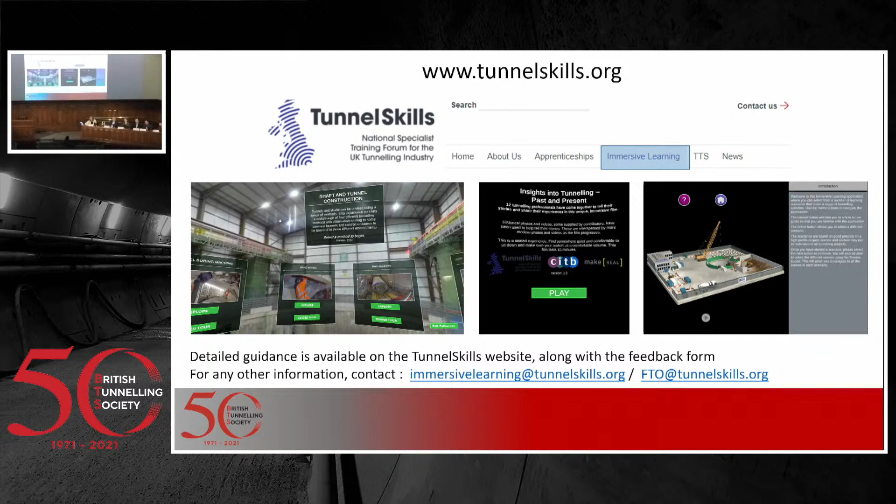Just as a little reminder, we did this year create a series of songs linked to the BTS book that we've been developing. If you haven't heard them yet - I never thought I'd be in a position to say that the BTS has developed some folk songs, but we have. Please take a listen, as it's packed with extracts of all the different stories that people have told, and that has inspired Nancy Kerr, an excellent folk singer, to put our industry into song. So please take a listen.

So a little bit then on the book. As many of you have been coming to these events for some time, progress is still continuing. We have now got 501 stories and lots of introduction bits. It's getting quite big, 856 pages. It could still go up, but progress is continuing, and many of you might have seen just how big this is getting. But you've all got a lot to say. So progress is continuing, but we are still looking for support to get this over the line.

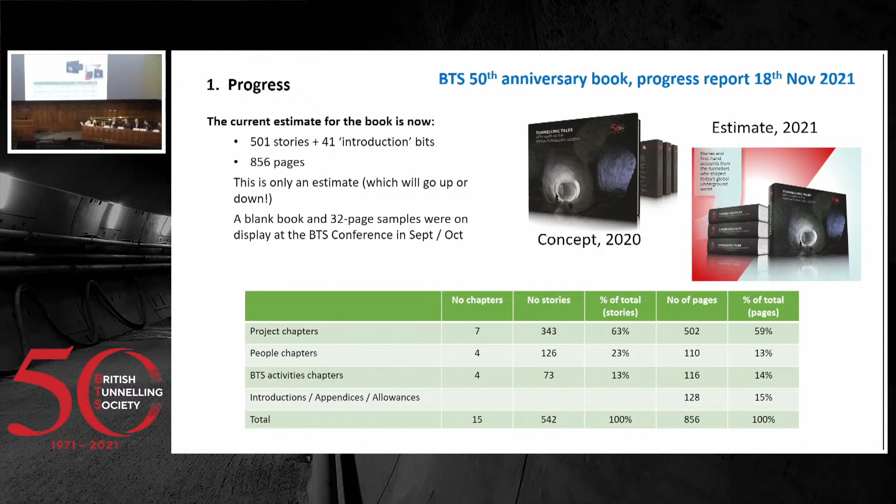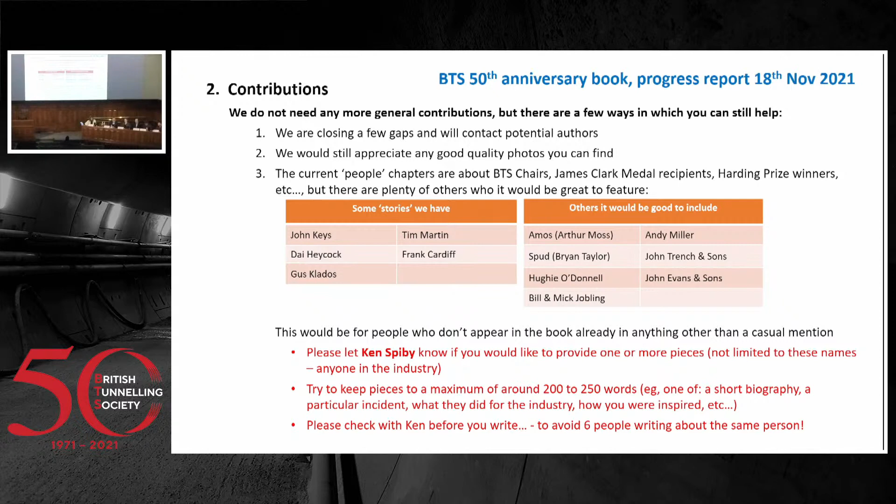We've had a lot of contribution, and we are closing the gaps, and we will contact some potential authors. But what you will see is there are some other stories about people that we know have made a big impact on this industry that we are looking for. So if anyone would like to provide one or more pieces, please get in contact with Ken Spiby. It may even be something really, really small, but we would really value any support and help. So please check in with Ken.

So programme-wise, we are hoping to go to print in April 2022, with copies being ready by end of April, May. And a big thanks to our sponsors so far and those that have pre-ordered. And pre-ordering, I've been told, should be available shortly.